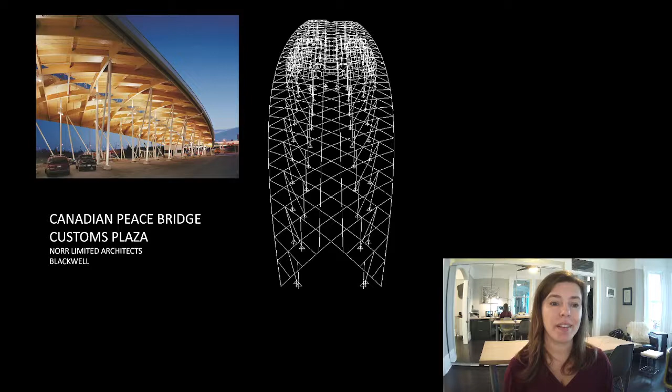This is the Canadian Peace Bridge Customs Plaza. I normally tell students that if you've driven across the border and had your car torn apart, this is probably where you parked while you did it. Although most of you haven't crossed a border in forever, so many of you may not have even seen this.

It's a reciprocal frame, meaning it's not stable until all the parts of it are in. Dave and I have given lots of lectures on reciprocal frames. We've talked in Helsinki, we've done podcasts in Australia, we've given lots of talks on reciprocal frames. It's a really cool micro element within structural engineering.

It also had this cool element where all the floors had a big opening cut in the concrete, so obviously there was some analyzing of the old existing building in that. But one of the really cool things was on the roof, they wanted to add mounds of soil up there. That roof was designed for some snow loads, and that was about it. It wasn't strong enough to take the loads that we needed.

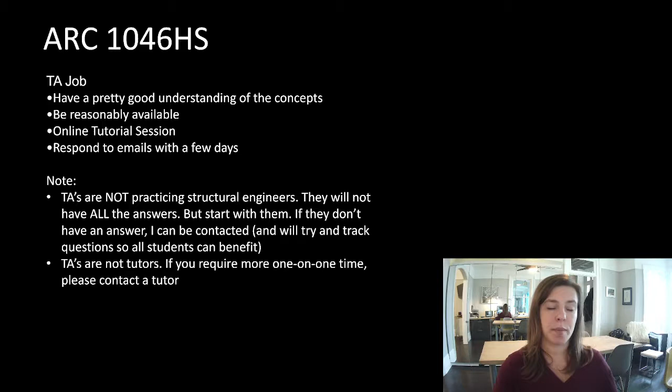One of the things I really want you to understand is that the TAs are not practicing structural engineers. They're students who have either done really well in my course, or maybe they've done an engineering degree, but rarely are they anyone who has practiced structural engineering, which is not the same thing. A lot of the concepts we're talking about would come from real world experience. They will not have all the answers for you, and they shouldn't have all the answers for you. But start with them - they can probably send you on the right path. If they don't have an answer, that's when you guys can come to me with the question. Again, they're not tutors, but if you require more one-on-one time, you should probably try to reach out to someone.

So what's your job? You should watch all the videos. You should download the PowerPoints. You should review the examples. You should download all the material - don't print it, just download it, and maybe organize it nicely in a folder for yourself. You should submit any questions you have to the TA. You should definitely complete all the assignments. They're easy marks - some of them you'll have to do some work, it's not read it and you get all the points, but some of it, read it and you will get points. And then complete the project.

I usually do a pretty good job of giving you a full description of what you need to provide me. I make it very easy for you to get marks in this course. Failing someone is a lot of paperwork for me - it's so much paperwork, I don't want to have to do it. So if you can pass, I think we'll both be happy.

And then study for the exam. So if you need any extensions, additional time, or have special needs in any way, please contact Student Services so they can set you up in the system. I'll do what I can to help, but there are some things that I just am not allowed to do, especially when it comes to the exam.

All right, you should take notes, but the slides are available, and you can go back and watch the videos. You should just write down calculations, lists, and equations. I've always found it helpful to write something out - it helps lock it in my brain. I'm very nice about hints if you pay attention. Like, I will say, oh, this is a fantastic exam question, because it's literally what is on the exam. So if you just listen to my tips and hints, you can probably, without even thinking, get a high score on the exam.

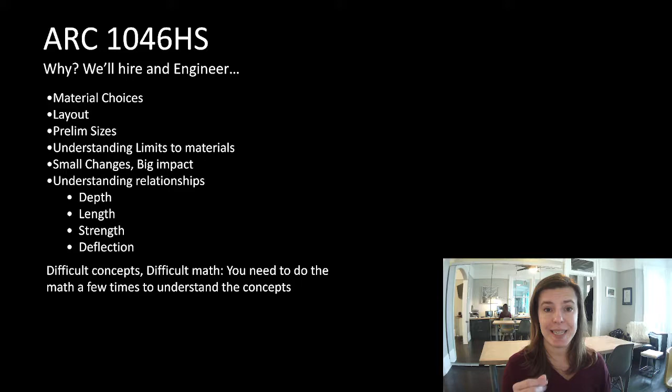There's usually a worked out one in the assignment, and then there's usually a second worked out one that we don't go through together, but you have it there for a reference. So for most things, that's 3 different types of problems of the same kind of thing we're discussing.

So I said that this is structures 1 and structures 2, and we need some way to break the information up into these 2 different courses. Different teachers break it up different ways.

This is the way I came up with, and I've since seen a lot of other course layouts that are very similar to this.

So what we do in structures 1 is we talk about how we create our system. What's our preliminary design of the members? This means not the actual design, but what we would put on a set of drawings very early on, before we've done the design.

So this would be what you guys do. This is the architect's job that we were talking about here. Then we'll talk about what the engineer does and how it works with you guys.

We'll look at the loads and the load paths, and then we'll look at the element loads. So each element, what the internal load is on it.

I'm gonna just pull out my handy, I have to hide this or else my kids play with it.

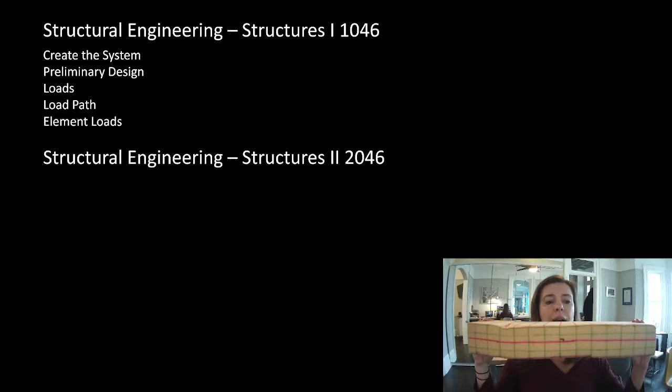Here is, I'll use this a lot to talk about how things, this has been squashed a little bit, hiding in my filing cabinet. So you can see that this is straight.

If we put a load here in the middle, it would move like this. So the question is, you can see the top of it squishing and the bottom stretching out a little bit. You can see those rectangles deformed in different ways.

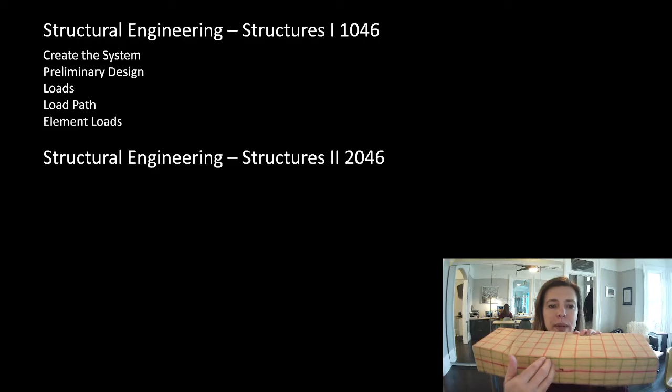We want to know what's happening inside here that makes that happen. And so those would be our element loads, or the loads internal in our elements.

And then in structures 2, we design and size the members. No problem. That's all we've got to do next term when we come back, when you guys come back and join me in 2023.

It's really where all the concepts come together and allow you to pick the perfectly sized member. So that's where we have to talk about all of the different materials.

And so how do these internal loads impact something in steel, something in wood, something in concrete? So basically on this side we figure out what the loads are, and in this half we figure out what resists the loads.

Okay, so now we're going to get into lecture 1. And in lecture 1, we're just going to talk about what is structure. Really, why are we doing this, and talk about where it fits in the design process.

We're going to do a quick review of basic math. I'm not going to spend any time showing you how to work them out. I'm going to assume that you've gone through some of that in your life, and if you need to, you can go back and look those up.

But I just kind of want to give you a quick refresher on the basic math, and that will be on this week's assignment. And then we're going to talk about strength, stiffness, and stability, because those are really the three core concepts of structural engineering.

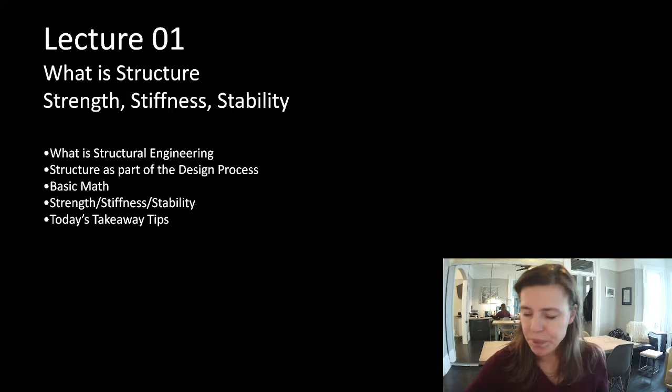Okay, so let's go through lecture 1.

I just want to give an idea of what structural engineering means. If you look up the definition, it's a field of engineering dealing with the analysis and design of elements that support or resist loads. What does that mean? We have to figure out all the loads, all the things that happen in the world on our building, then figure out how that moves through the building, and then figure out if all of those things holding those loads up are strong enough to support them. So the analysis is asking, is it strong enough? And the design is having an element that works.

So what's our goal? Design safe, stable buildings that are the cheapest possible while meeting the constraints, needs, and demands of the client. Cheap does not mean ugly, but it often means the lightest thing we can possibly do. So cheap is our goal.

If you could pick two mugs that looked identical and performed identically, why would you want the more expensive one? So we're saying it doesn't have to be ugly - that's one of the constraints. We are making something beautiful. My job, within those constraints, is to make it as cheap as possible. If you say this is an important thing, we need this, it's expensive, what's the cheapest way to make this expensive thing? That's a reasonable constraint. We're not trying to say cheap equals ugly - we're trying to say cheap has a value added to it.

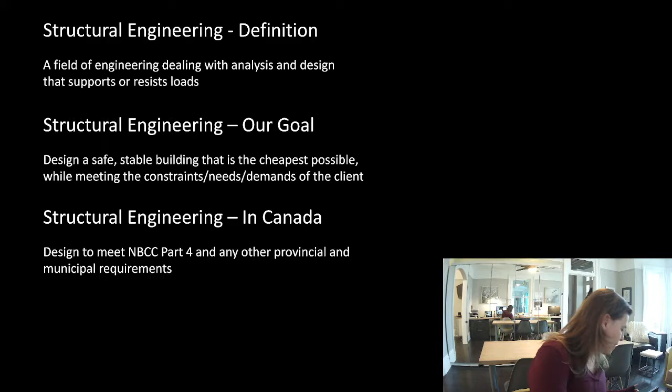Often the cheapest is the lightest of that material. So let me try to find an example - we have a Sharpie and a fine liner. It's probably hard to tell, but the Sharpie is much bigger than the fine liner. If both of these could support the load, why would we get the heavier one when the cheaper, lighter one will do the trick?

Engineering in Canada has a very specific requirement: we have to design our buildings to meet the National Building Code of Canada, Part 4, and any other provincial and municipal requirements. Provincial for us in Ontario is the Ontario Building Code, again Part 4. Part 4 is the structural component of the Canadian codes. Architects are usually working within Part 3, the structural engineer usually within Part 4. There is a Part 9 that has some structural component, but that's what you use when you don't design - if you want to just look things up in a table and you meet the constraints of Part 9, you can use it. We're not here to talk about Part 9, we're here to talk about Part 4.

You will see there are some spots in these lectures where I say, hey, if you were doing Part 9, this is what you would do. But that is not what we're doing here in this course.

When you're designing - and this is a hard thing to get people's heads around, both architects and engineers - precedent doesn't mean crappy. Precedent means it has proven to work, and unless you have a good reason to do otherwise, why would you not use the precedent? It's probably the cheapest, quickest, and easiest option. Cheap, quick, and easy - without any other constraints, that's really our goal. So understand the precedent and use it when you can. If you can't, take the precedent and tweak or change it to meet your new constraints.

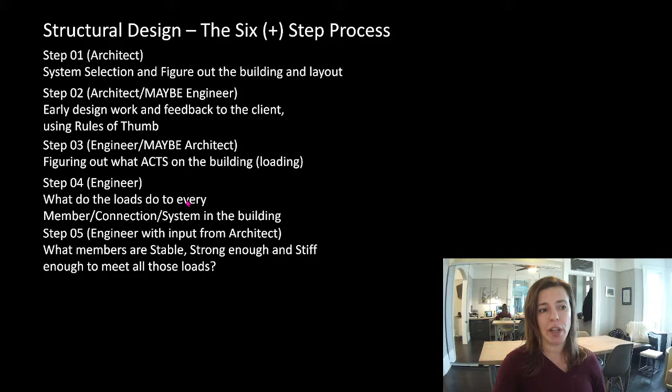Then the engineer goes through the process, and maybe we'll ask the architect some questions, and we find a member that is stable, strong enough, and stiff enough to meet all of those loads. We figure out what all the internal loads are on all of those things, and then we check and see if the elements we've picked work.

Are they strong enough? Are they stiff enough? And are they stable? Then maybe the architect says, oh, that one's too big, or we've moved this around, or we've changed the length of this, or we have to increase the story height here. So you have to go back and go through the whole process again several times, and that's usually the normal iteration of the design process.

So what does structural design mean to you, the architect? Well, you'll need to know how to pick the best system. Now, best is not literal—there's always different ways to do things, but the best system for your needs. That usually means the cheapest and then the smallest within your constraints. The best layout means knowing what constraints the owner has given you.

And you'll need to know the approximate sizes, which would be the rules of thumb or the sizing guidelines.

Here's the cool thing though: you guys have secret weapons that engineers don't have. You get exposed to precedent—so many cool precedents. Engineers don't look at an actual building pretty much ever. I don't remember looking at a building as a whole in my entire schooling. When I started working on the first day, I was blown away by how much I didn't know about how a building comes together. I knew how to design a beam, I knew how to design a column, but I didn't know how to bring those things together. You know how all the cool buildings come together and what they look like.

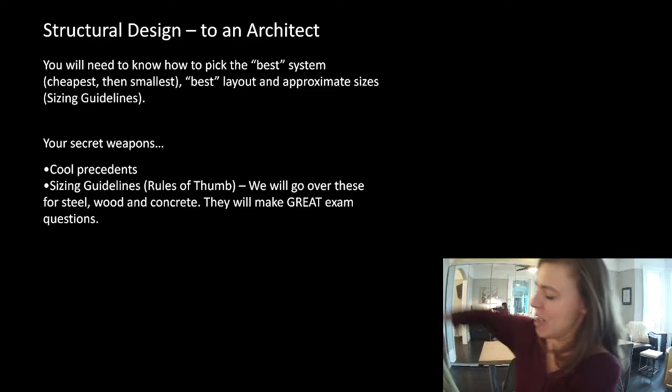I just need to check and make sure. Hi, well I just turned it on. Say hi. Hi, who are you? I'm Malcolm. How old are you? I'm 5. And what's your favorite thing in the world to play with? Number blocks. Do you love numbers? Yes, so much. All right, go, go, go. Okay.

Okay, so the sizing guidelines are your other secret weapon. We'll go over these for steel, wood, and concrete. What it does is give a very simplified guess at what member you'll need to do that job. It's not the right answer, but often once the actual structural math analysis by the engineer has been done, you're going to find it's a pretty close guess.

Why do you need to do it? Because it's a really good placeholder to draw in your drawings. Often you're doing a set of drawings early on, and if you drew beams that were this deep on a 5-story building with really tight height clearances, and when you hire the engineer you find out you need beams that are this deep on all 5 stories, you've missed out on this much depth within your building. When you build that in so people don't bonk their heads on the beams, you've gone over your height limit, which means you have to chop off a whole floor of your building.

All of a sudden the owner can't afford it with the rental space they have, and the whole project gets cut. That's an extreme version of it, but that's what we're trying to avoid, and what you're trying to avoid. Knowing that you needed a beam this deep, maybe it ends up being this deep, maybe this deep, but it's not a drastic difference. So it's a really good placeholder on where to start. The final design will probably be pretty close to it, assuming you're in the world of normal things. If you're doing something unusual, the sizing guidelines aren't going to be as helpful for you.

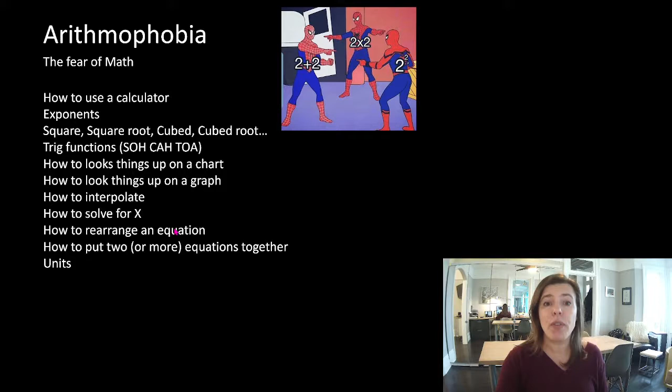Now, some of these I won't look at explicitly, and we will cover them throughout the term. And some of them you'll see, like even in our trig functions, when I review the basic trig functions, we rearrange them to solve for the unknown we want to solve for.

Like I said, some of you are terrified of math, and I found this, and it really struck me that my partner Dave and I, as much as we spend all our time doing math, every now and then we have to go back to first principles and do integrals from, like, third order integrals or something like that. And even then, I am terrified of math sometimes.

When I was in university, in the engineering department, engineers, you might not know this, but engineers like to be right all the time. We're not good at being wrong. So a lot of them came into the program, including me, being a know-it-all. And so they purposely built into the curriculum the 'we will break you' course. Most of them had never gotten a bad mark in anything in their life, so they purposely made it so that everyone would fail. Everyone fails that course. You can do everything you do at your best and you will fail that course. It is impossible to pass. And then they take the highest mark and set it as 100 and scale the course accordingly. I got a 40 on the exam and I was in the top 10%, and so I felt really good about that day. But there was a lot of sobbing throughout that course, so I get it.

I respect the fear of math. Okay, let's give some quick math refreshers and then we'll jump into the actual lecture.

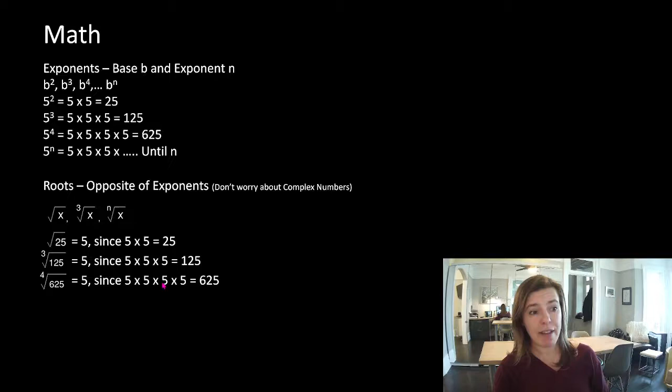So what we're saying is what number, or what would the opposite of it have been? So the fourth root of 625, basically what number timesed itself 4 times to give 625? So root 4 of 625.

So that would have been 5 by 5 by 5 by 5 giving us 625. I know most of you know this. I'm just trying to flesh it out and calm down the people who get worried about the math here, because I've already had emails from people worried about the math, and so I just want to calm everyone down.

So most of you have a scientific calculator of some sort. We're not going to use a lot of the buttons on it, but we will use some. I think this is like $15, and I recommend you have a scientific calculator.

Yes, I know your iPhone, if you pick calculator... my phone is apparently having a meltdown. Wow, it didn't like that at all. For most of you, if you have your phone like this and turn it on its side, it will turn into a scientific calculator. The iPhone calculator, I don't know what it is, but the buttons, I have to punch everything in 5 times, redo it so many times. I much prefer my calculator.

I can't always tell you exactly how your calculator works, because some you have to press the second function option first and some you have to press it second. So every calculator is a little bit different, but you usually want one that has a second function button. You can see this calculator died on me, so this is the next generation of the same one. This is my b to the n or y to the x. They usually have the default of squared and cubed, the square root, but then they also have cubed root and x root.

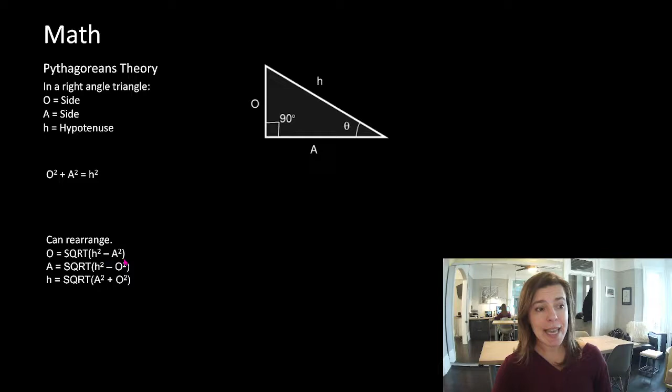So we can rearrange it. Here's our H, it's the square root of A squared plus O squared. So we can arrange, if we knew H and A, O equals the square root of H squared minus A squared. So with any 2 of these sides, we can figure out the third side.

What else do we know about a right-angled triangle? Well, I always called it SOHCAHTOA. Someone one time came to me with another name for it that I had never heard, and it blew my mind. But I'm going to call it Sohcahtoa.

O is the opposite side, so we're picking an angle. We could pick this angle or we could pick this angle. If we pick this angle, this is the opposite side, this is the adjacent side, and this is the hypotenuse. In a right angle triangle, the sine of the angle is opposite over hypotenuse.

The cosine of the angle is the adjacent over the hypotenuse. And the tangent of the angle is opposite divided by adjacent.

And I cannot stress this enough: make sure your calculator is in degrees. If you have it in gradians or radians, you will be absolutely effed, because sometimes they can end up with a pretty close answer, just enough to screw you up. A lot of times it'll be totally obvious why you're getting wonky answers, but not always.

So we can rearrange this to find the thing we need. If I took the sine of the angle equals opposite divided by hypotenuse, and I want to know what the angle is, I take the sine inverse of opposite divided by hypotenuse. If I knew the hypotenuse and the angle, the opposite side is the hypotenuse times the sine of the angle.

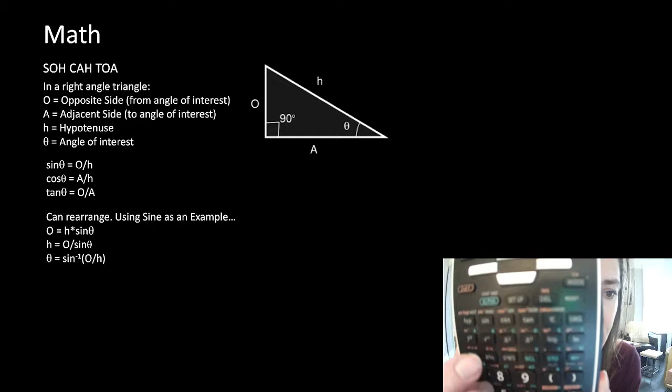How do you punch this into your calculator? Well, it's usually directly above whatever... it shows up on the next slide, but you have to use a second order function on your calculator. So make sure your calculator is in degrees.

If you want, here are some worked out problems that you can solve. If you know you struggle with this stuff, just cover this up and cover these up, and then you can go through and find your solutions.

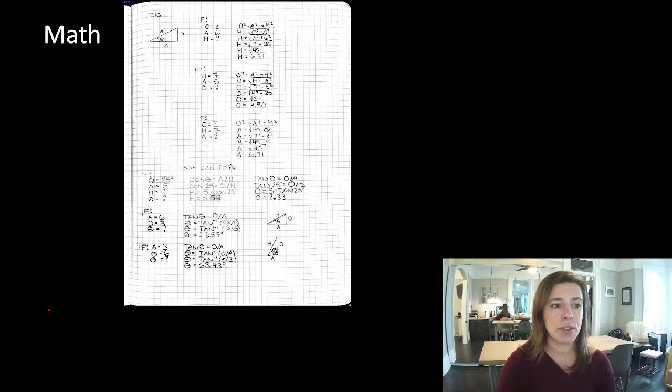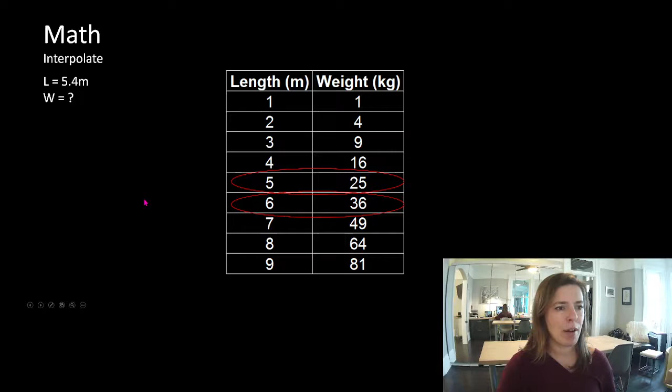So you figure out the difference between these two, and you figure out the difference between these two, and then you basically just make a ratio of those. You can go through this problem and solve it.

I find talking it through only confuses people. Intuitively, you often know how to do this. Look up interpolation, practice with a few problems, and you're gonna get the hang of it. Most of you intuitively already know how to do this.

But we got 30 kilograms on the chart. The exact, imprecise answer is 29.4. So some people like to do a triangle to help them interpolate. Here's just a slightly more worked out version of that same problem for those who might struggle.

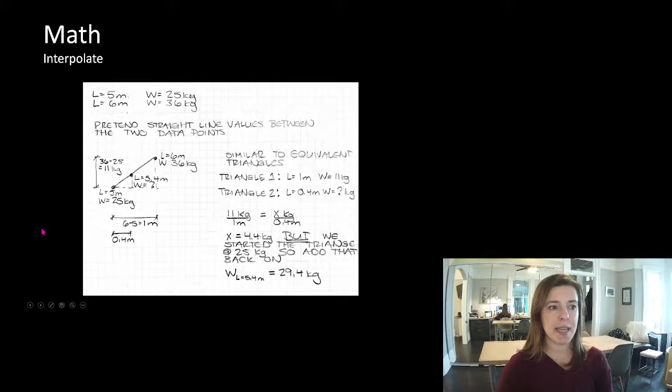What are some of the units that we're going to be talking about? Because we do have to convert between units. So length, we're going to be working almost exclusively in metric, except some things will be given to us in feet and inches, because a lot of residential or wood-framed construction drawings are still done in imperial, which is a total pain in the butt, but it is pretty standard for those types of projects. We will often, for wood projects, need to convert to metric to do our analysis.

So 1,000 millimeters is 1 meter, 1 inch is 25.4 millimeters, and 12 inches equals 1 foot. I'm sure these are all things you know.

Force or mass, depending on how you talk about it: 1 kilonewton is 1,000 newtons. 1,000 newtons is 102.06 kilograms, and that is about 224.8085 pounds, but we'll often use 225 pounds in our calculations. So if we need to convert something from pounds to newtons or kilonewtons, we'll use 225 pounds.

Pressure: 1 MPa is 1 newton per millimeter squared. 1 MPa is 1,000 kPa. So that means 1 kPa is 1 kilonewton per meter squared.

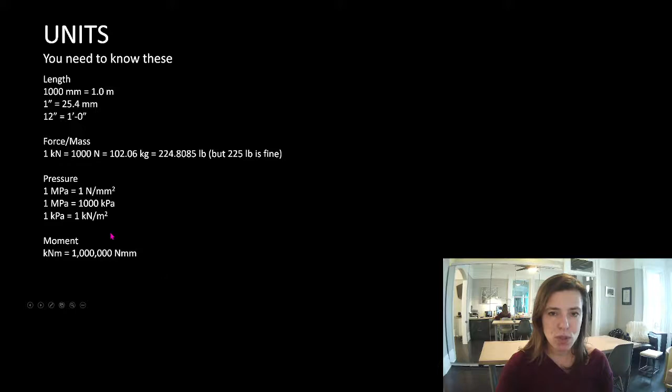Moment, we're going to be dealing in moment. You don't even know what that is yet, but it's a kilonewton meter, not kilonewtons divided by meters. There is no divide symbol here. It's a kilonewton meter, so those are multiplied by each other. 1 kilonewton meter is 1,000,000 newton millimeters, and we will convert back and forth between these two things. Not so much this term, but next semester or next year when we do structures 2, we are going to convert back and forth between these two all the time. In almost every problem we do, we're going to convert back and forth between these two.

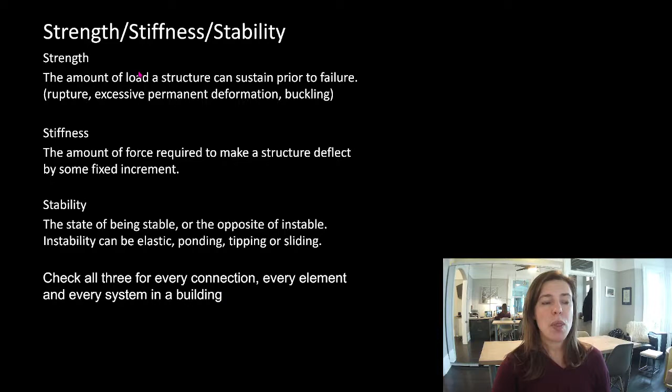For every connection, every element, and every system in a building, we check that it's strong enough, that it's stiff enough, and that it's stable. So we check strength, stiffness, and stability for every connection, every element, and every system in a building. These make good exam questions or test assignment questions.

All right, do you see this? We don't use this anymore. This was a way we used to do design. We used to say we have a load on a system and we know what its capacity is, and we don't want it to be just strong enough. We want a little bit of a buffer in there. So what does that mean?

All right, this is my table, and I'm sitting on my table. The material is wood, and it has some capacity to resist load. It's got to hold up the weight of the table itself, and it's got to hold up me. Now, what if I go out and eat a cheeseburger and have a beer, and I come back - and we had made this table just perfectly strong enough to resist the load of Shannon? Well, if I go out and eat a burger and a beer, I'm now Shannon plus a burger and a beer, and I get up on this table and it collapses. That doesn't seem like a very well-designed table if there was zero buffer in there.

So what we would do is we would often say, okay, I'm going to design it for 2 Shannons, or 3 Shannons, or 4 Shannons, or 5 Shannons. But we wouldn't have just done that. We would have said, okay, there's the weight of Shannon and the weight of the table, we're going to add those up, and then we're going to design it for 4 times the weight of Shannon and the table together. But it's a little bit weird because the table's not going to get bigger.

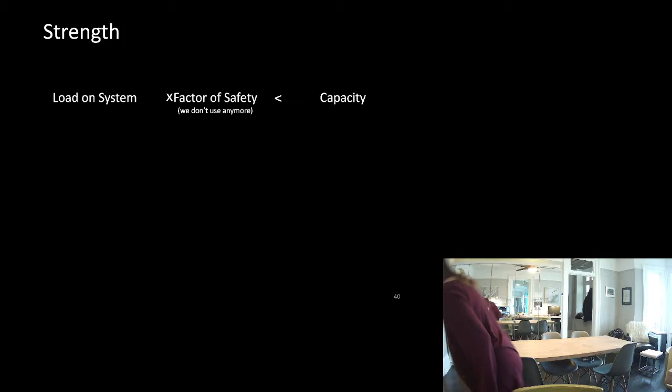It didn't treat that at all, and it treated the loads all the same way. So there was no variability in whether it was a live load or the weight of the table itself, me being alive, the live load. And it didn't do much about what the wood was capable of. We just had the capacity of the wood, and then we built it all into the loads, and we called that factor of safety.

So we would take the load on the system and multiply it by a factor of safety, and that factored load needed to be less than the capacity. But the fact that it treated all the loads the same and didn't address the materiality at all, people found a bit problematic. So they came up with a new system, and this is the system that we use here in Canada. They use it in the United States. They use it in most European countries.

Instead, what we say is, let's look at each load individually. We'll add them up, but we'll factor them independently. And we'll look at the material and we'll say, okay, we know that table is as strong as that table, but what if that table had a flaw in it? What if there was a knot in that table? What if there was something with that table? We reduce the capacity as well. So we factor up the load and we reduce the capacity, and this factored load needs to be less than the reduced capacity.

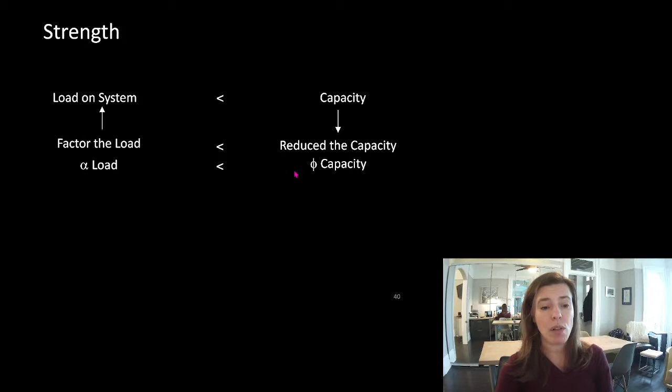Now, we like to name all things. So we factor the load, we reduce the capacity. We often use Greek symbols. This was less terrifying pre-COVID when we started giving Greek names to all of them. But we would factor up the load and reduce the capacity. You'll see this symbol get used a lot in structures too when we talk about the reduction factor for the material.

And then we look at that for every type of load. Now, you guys don't know what these types of loads are, but for example, moment. Well, that capital M means moment, and a subscript F means I factored the load. We want the factored moment to be less than the reduced moment. If you see a little F here, it means we factored that load. If you see a little R here, it means we've reduced the capacity. Whether we're talking about axial loads, shear, moment, tension, compression, it doesn't matter. The F means it's been factored. The R means the material capacity has been reduced. And we want our factored load to be less than the reduced capacity.

You're gonna hear me say this a gazillion times throughout the next year: we want the factored load to be less than the reduced capacity. We could take it almost to equal. In fact, it would be perfectly designed if these two things were equal. Now, we don't have the same danger of going out and eating a cheeseburger and beer and breaking the table, because that burger and beer has been built into the factored side of this. We don't have to worry about a flaw in the material or them not building it quite right, because we've taken that into the reduced capacity.

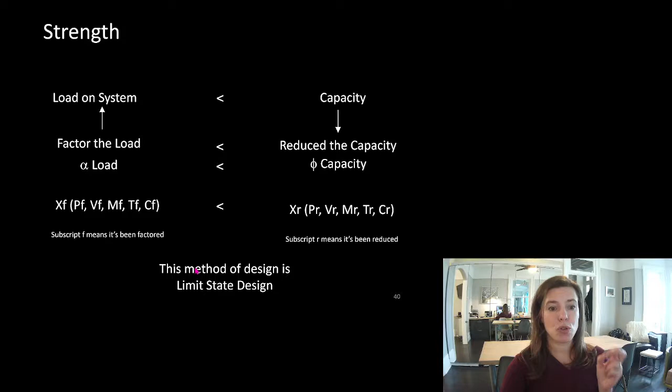So if we factor up the load and make sure it's less than the reduced capacity, we will be fine. This is called limit states design or limit state design. Sometimes you'll hear it called ultimate limit states design. It is not the same thing as the ultimate design case; that is something different. Limit states design has two components: ultimate limit states, which is all about strength, and serviceability limit states, which is all about stiffness.

All right, what are these different loads that I talked about? I said, if there's the subscript F or the subscript R on that particular type of load case, we know what we're talking about. Or force type, I should say force type, not load type. So these are the different force types, not load, because load is what we're putting on the thing.

So compression, intuitively you know what compression is: it's when we squash it. Tension, you know what tension is: it's when we stretch it. So this is kind of hard to stretch. Compression... oh, what happened when I tried to compress this? That was weird. When I try to compress this, that doesn't happen. I'm pushing just as hard. That seems like something we'll have to talk about later. So compression, tension.

Shear always messes with people. Shear is saying what happens—here are my business cards. We're saying what happens when these planes try to slip past each other. We have this side going down and this side going up. Those are trying to slip past each other. What happens there?

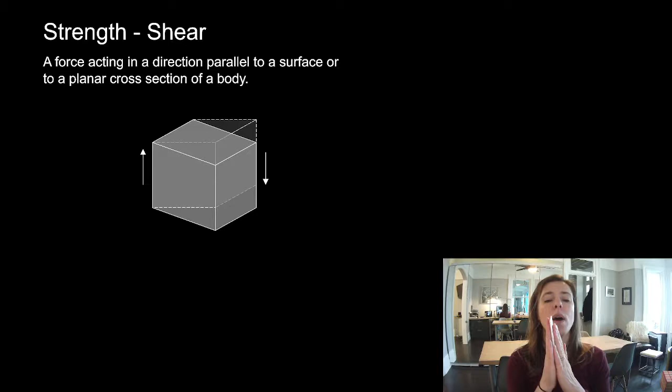Then let's go over another business card. We have to do the same thing, and over another business card, same thing again. We're looking at every single spot along the stack of business cards, saying what's happening as these try to slip past each other. For our member as a whole, we've sliced it up at every point along its length to see what's happening as any two planes try to slip past each other.

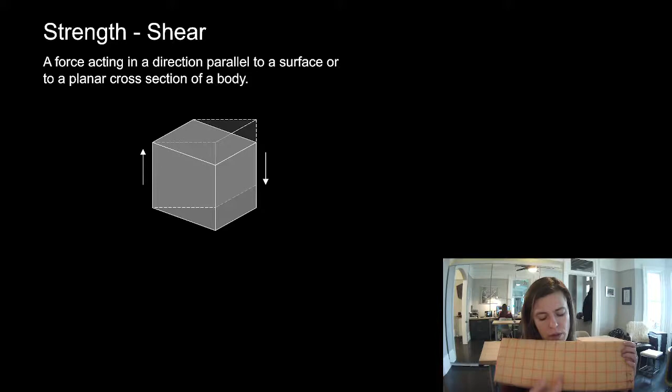If it's a connection, it's usually not too bad. If we're taking a piece of steel and trying to slide it past another piece of steel, it's very obvious where that plane is. If we've got a big long object like this, maybe we're trying to slip it along this plane, or this plane, or maybe in the middle here. As we add more planes and talk about a gap between those, we start to get this skewing action. So you'll often see this shape when we talk about shear.

Now look at this, it's really interesting as this happens. I had a square here, and here it looks like that is compressing on that angle, whereas here, those two look like they're stretching apart from each other. When we see shear failures in concrete, which we'll talk about in a bit, you'll see cracks along this line right here, or I guess along this line right here. It gets really interesting as those two things try to pull apart, because concrete doesn't like tension, and we'll get a crack right there.

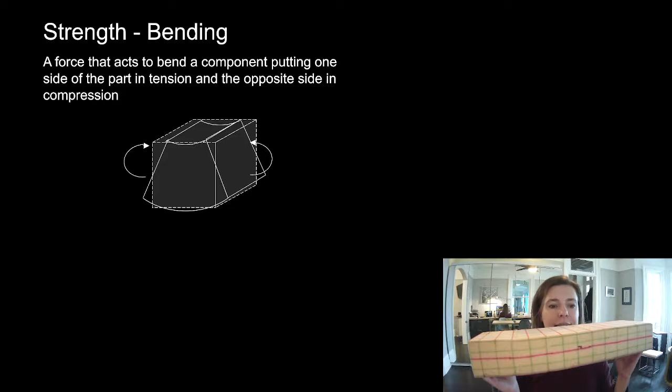Bending: a force that acts to bend a component, putting one side in tension and the opposite side in compression. Remember when I took this beam and bent it like this? We saw the top squares squash and the bottom squares stretch, and those all stayed as straight lines along there—that's a cool thing we'll talk about in structures too. The top is in compression and the bottom is in tension.

What happens if I bend it this way? Well, now the bottom is in compression and the top is in tension. It looks like no matter what we do, we find some way to relate this to tension and compression.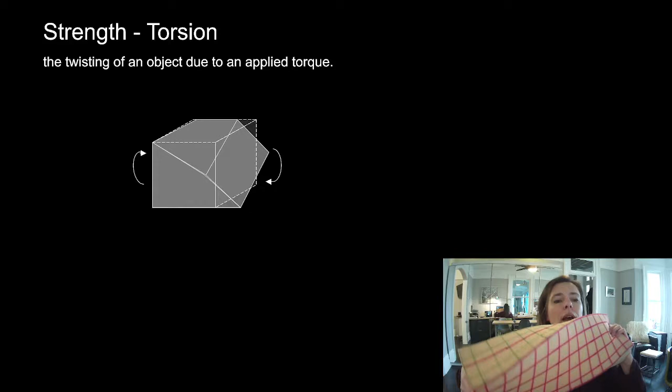Torsion, or torque, isn't something we're going to cover in this course, but it's this weird component of shear and moment about a different axis of the element. You can see we get that same weird skewing we got in our shear problem, but there's also a moment component to it. We talk about it in kilonewton meters, the same way we do moment. Again, we're not going to do any work on this, but it's important to know it's a type of force.

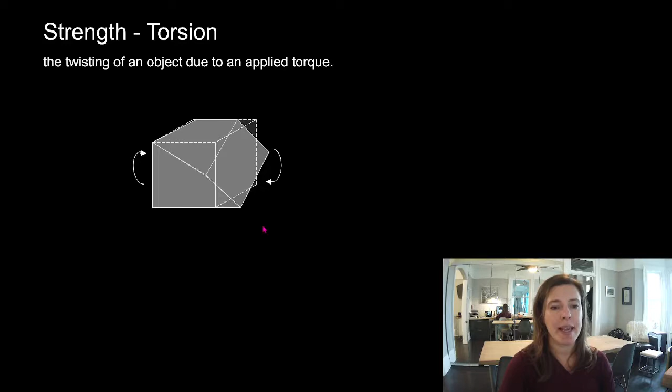Connections involve a ductile or brittle combination of axial, shear, bending, and torsion on local elements, or where they intersect with each other.

All right, let's look at some failures, because that's really the best way to get your head around what's happening. Otherwise, it's just an object not doing anything.

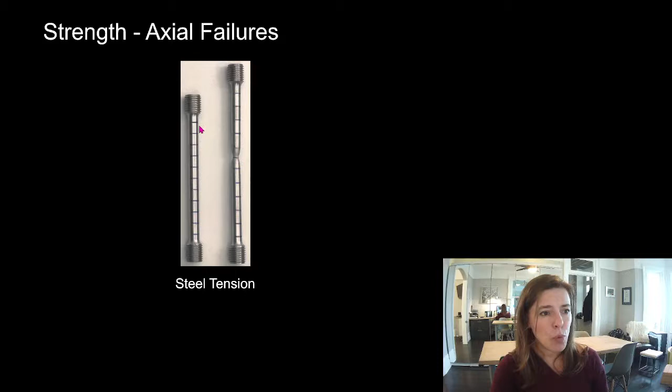Axial failures for tension: you can see our steel pulled—steel does some interesting things, and we'll look at videos about this next year when we talk about steel. But you can see, just like I did, they drew little lines on this, and every single one of those lines got some distance between them. Something weird happened right where it failed, but that's not the same dimension it originally was. So there were original sizes, and then there were the final sizes.

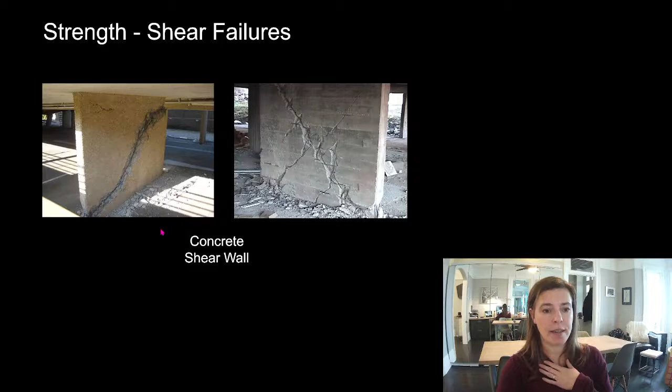Well, this one was a windstorm of some sort. It could have been the same as this one, and we'll talk about it in a second, but often this is a pretty distinct failure. Wind usually has very high loads in one direction. Obviously there's hurricanes and tornadoes, but those are so isolated and usually not acting on the building as a whole over its entirety. Even a hurricane would usually have higher winds on one side versus the other. I'm from Halifax, and when Hurricane Juan went right through the eye there, certain trees went down in one direction and certain trees went down in the other direction. But even still, the wind is usually highest on one side. So this was a windstorm.

This was an earthquake, because earthquakes often with the same force will make your building shake back and forth. So this is very distinctly an earthquake failure.

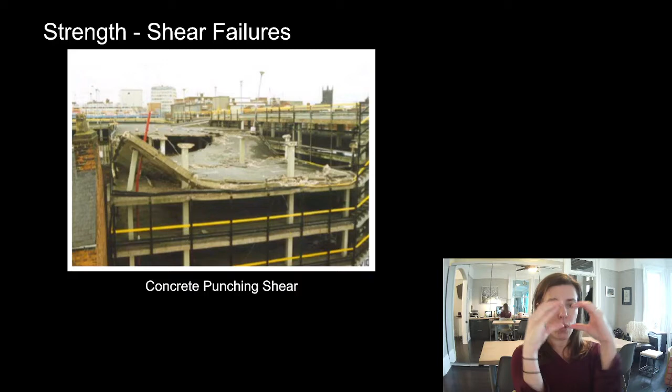If you tried to hold up a block of Jell-O on a toothpick, you know it would slip down. That is a punching shear failure.

I don't want to talk about recent failures in case it's sensitive to anyone, but you can see here that they put things at the top of these columns. Often we'll put capitals or dropped slabs to try to increase the thickness locally around the column to prevent that punching shear phenomenon.

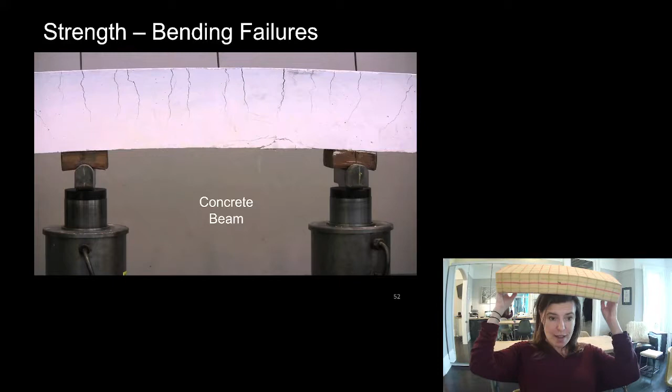This is a concrete beam. These aren't the supports, these are the loading elements. This concrete beam is actually much larger than what's being shown in this photo. So what we have here is a support here like this, and it's pushing up on it. So the top is in tension and the bottom is in compression. Concrete does not like tension at all, so you can see these are tension failures in concrete, and this is a compression failure in our concrete.

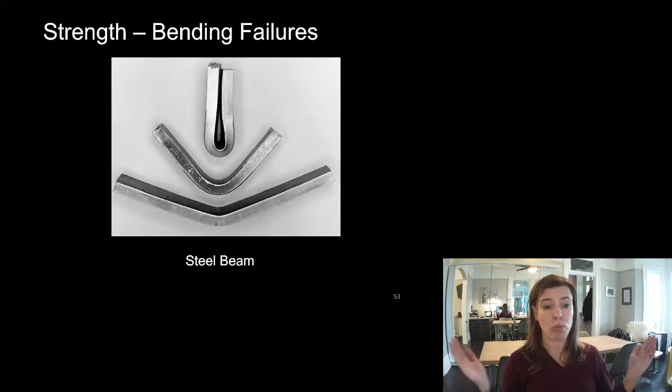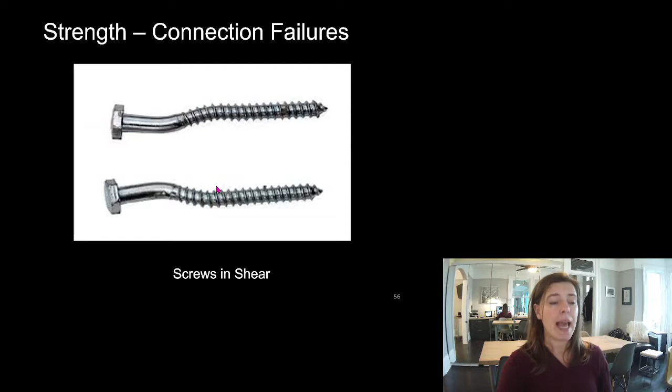So you've sheared off the head, even though what you've really done is torqued off the head. Here's a steel shaft, so this would be some sort of drilling rig. Here is a screw in shear. We said that's the act of these two things slipping past each other. If I put a screw through there, one side tries to go up and one side tries to go down. So that goes up and that goes down, and in this one that went up and that went down, and it deformed it in that diagonal failure I talked about.

So here's a close-up of a beam in shear. This likely wasn't an under-designed situation. What often happens when they're installing steel—because the boom lifting the steel into place is the really expensive part of the construction—they'll often have someone just follow along, hoist a beam in, and put a bolt in. For the self-weight of the beam, one bolt's probably just fine. They might even put two in. Then the idea is later they'll hire the cheapest person in their crew to go back and finish putting all of those bolts in, and then they'll start building the rest of the building on top of their steel.

My guess—now it's always hard to go back and analyze something from a picture—is that this was a condition where they didn't come back and put the bolts in.

This is a plate in tension where they actually managed to pull it apart.

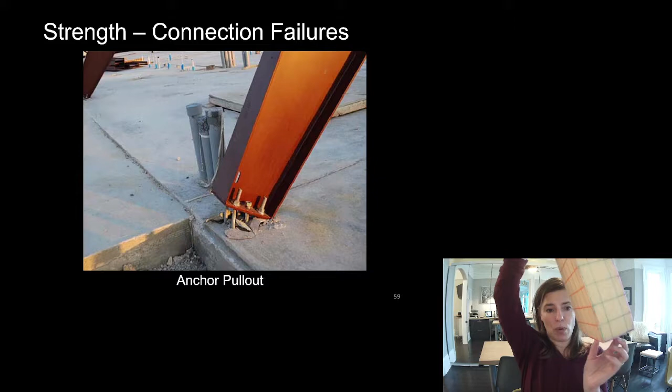Here is an anchor that has pulled out. Now, what's happened here is this column tried to tip over, and down here we had two anchors close together. As it tried to tip over, it forced it to bend a little bit there. This side pulled up out of the ground and this side squashed down.

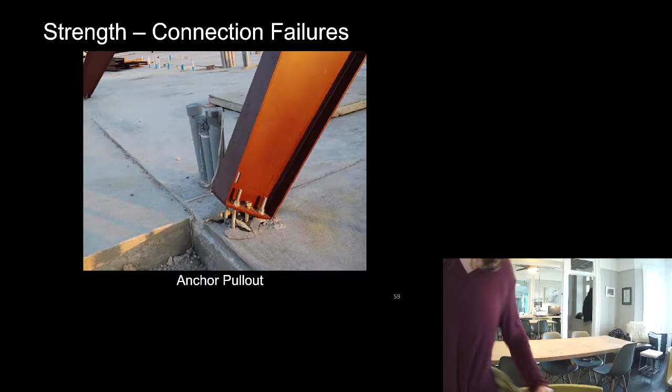What would happen if I turned this and separated those anchors out a little bit? Do you think it would be able to resist more or less load? Intuitively, you know that if something's trying to tip over, you spread out the bottom of it. If you tried to stand balanced on your toes and someone tried to tip you over, you'd tip over very easily. If you spread your feet flat, you're a little bit better. Spread your stance apart when somebody tries to tip you over—it's a lot harder. What you've done is understood implicitly how to resist a moment.

We're going to talk a lot about this. We're going to draw pictures of it, and you're going to get yourself all confused. But intuitively, you understand how to resist moment.

So, stiffness. Stiffness is not a life safety problem—strength is about preserving life, we want people to live if something happened. Stiffness, as much as it's not about life safety, is the thing we get sued about all the time. People hate seeing cracks in their finishes, they hate seeing something wrong, and they assume it means there's some major problem. Sometimes there might be a major problem, and sometimes it might not be that big of a deal.

But I would say probably—what would you say, Dave? 90% of the lawsuits are about stiffness in some form? Probably.

So we can have different types of stiffness issues: vertical, horizontal, rotational. We can worry about soil, and then vibration. Vibration's often its own category, but sometimes for certain purposes we'll lump it in with stiffness.

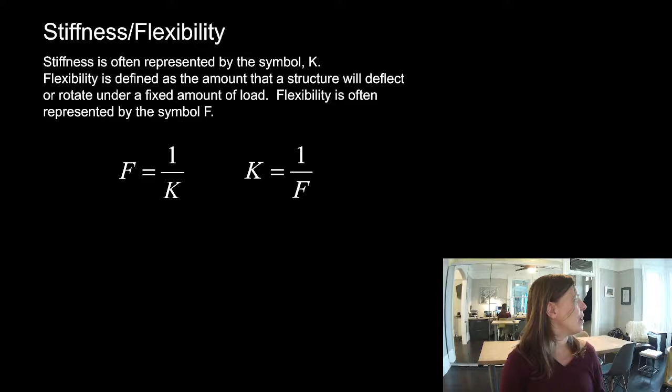Do you want me to finish up that food? I can stop if you need me to, Dave. He's deaf in one ear, so he has a phone to his good ear and he can't hear me now at all. Do you want me to finish that up? That'd be great, sure. Okay.

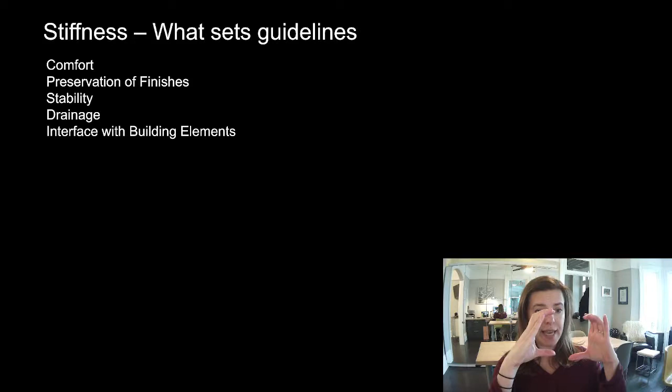So interface with building elements — a really good example would be windows. Our building is allowed to move a little bit, but a window, a piece of glass, is very, very rigid. It can't move at all while the building moves. So what we do is build almost like a frame that we sit the glass in, and there's a little bit of play, so that frame can skew with the building but the glass stays in it. We want to make sure we know how much the building moves so it doesn't squash the glass and break it, or move so much that the glass pops out of the shoe we've built. So we're talking about how do we preserve the finishes on this building and interface with building elements.

And now each of the codes has different criteria for different situations. Let's say for the roof, for example, are we talking about snow by itself or the self-weight and the snow together? And then, are there finishes that are susceptible to damage or are they not? Drywall is susceptible to damage. Plaster, anything that cracks, is susceptible to damage. So no ceiling — a big steel warehouse, for example, does not have finishes susceptible to damage. You put a drop ceiling in there, if it bends too much or there's too much deflection, those panels pop out of their frame. So that is susceptible to damage.

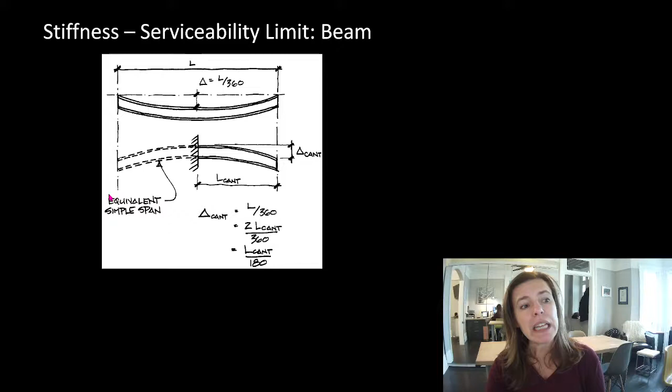Okay, here's an example. What is the amount of live deflection we will accept for a wood floor beam with drywall that spans 10 feet and has a 2-foot cantilever? Well, drywall tells us it's susceptible to damage. We're not worried about the dead and live combination, we care about the live deflection by itself, and it's a wood beam and it's a floor. So it looks like that's everything we need to pick the criteria: wood floor beam with drywall for live load. So floor, live, susceptible to damage, and it's wood.

So length divided by 360. We need to convert our 10 feet and 2 feet to millimeters because we want these deflection criteria in millimeters. The back span was 10 feet, so we take 10 times 12, because there's 12 inches in a foot, times 25.4 millimeters, because there's 25.4 millimeters in an inch, and we get 3,048 millimeters. For the live delta criteria, delta just means deflection or change. The live criteria for wood floor with finishes is the length divided by 360. So the allowable deflection, or the serviceability limit for this beam, is 3,048 millimeters divided by 360, or 8.47 millimeters. That is the serviceability limit on this part of the beam.

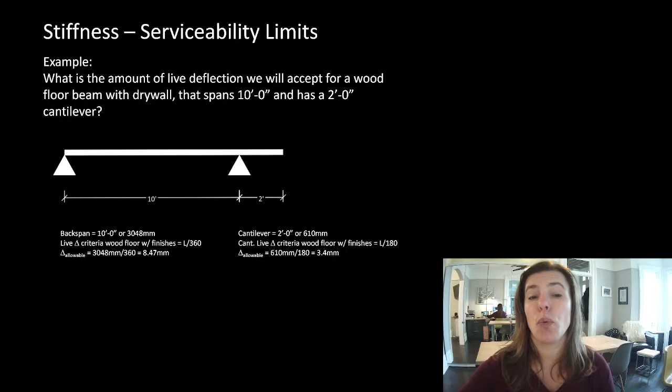In the assignment, I will say please write your answer to so many decimal places. So for this one, I might have said write it to 2 decimal places. If I only said write it to 1 decimal place, your answer is 8.5 millimeters. Going back to that, if I said 2 decimal places, and the answer is 3.4, when you try to put in the 0, it will delete it from Quercus. It doesn't mean you're wrong. If the 0 is supposed to be there and I ask for 2 decimal places, it'll look like Quercus is erasing it, but don't worry about that — it doesn't keep it in there, but it knows you have the right answer, assuming that was the right answer.

Okay, serviceability limit for lateral loads. This is how much our building can move under wind or earthquake. Now we have two criteria: each story, and the building as a whole. So if this is the height of the building, for wind, there's a subscript W, the deflection we let our building move is H divided by 500. So what if we had a 32-story building that was 3.2 meters each, so times 1,000 — that's 100,000 millimeters divided by 500. We're allowing that building to move 8 inches, so about 200 millimeters.

So it's actually a lot of movement. For earthquake, we allow it to move even more: H divided by 50 or H divided by 100. So we allow a lot of movement for earthquake, as long as everyone gets out alive. We don't care if a little bit of drywall gets damaged — it's such a rare event, and we accept a certain amount of loss due to an earthquake. So that's the building as a whole.

What if we had a really stiff building and one story that was weak? Well, we limit that story as well, so we have to do that same check for each story. The building as a whole might have met the criteria, but the height of this story divided by 500 might not have met its deflection criteria limit.

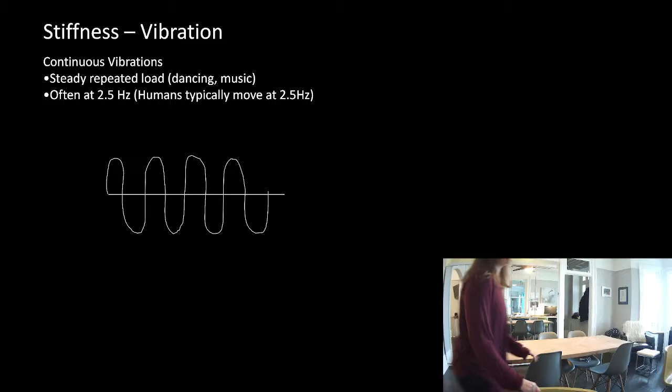A steady repeating load like dancing or music is often at 2.5 hertz, so humans typically move at 2.5 hertz. Stand up - this is a lot better when everybody's in a room together. I tell everyone to go up on your toes as slow as you can and down. It really burns the calves. Then I tell everyone to do it as quick as you can - again it starts to hurt. Then I tell everyone to do it just the amount that feels comfortable. If you looked around, everybody might not be moving at the same time, but they'd be moving at the same rhythm, and that's about 2.5 hertz.

Oh, I need to stand up for the next thing.

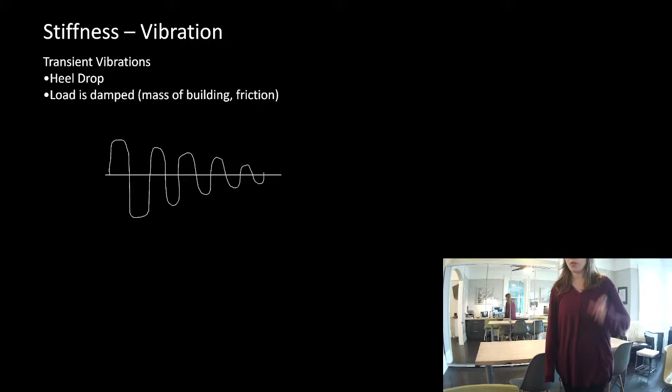Buildings - we also don't like floors to, we want them to dampen a load quickly. We don't want people to feel a transient vibration. So for example, you're going to see my camera move around there a little bit. You saw that move around a little bit and then stop. One of the reasons it stopped so quickly, but you could hear my window rattle for a little bit longer, is that the arm of my video camera dampened the load from me dropping my heel. So it had a very large initial reaction and then it tapered off really quick. Whereas the window had a really large initial reaction and then it took a little bit longer for it to dampen out.

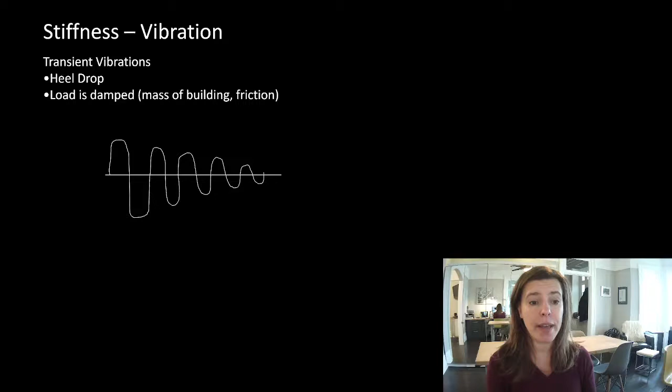So we like to have mass. We use weight often to help solve our dampening problem of vibration. Often we have concrete toppings on floors, specifically because it helps limit that annoyance of vibration through the floor. If you have somebody running laps around a track, you don't care so much. But if you have somebody running laps around a track by your office, it's really going to start to be annoying.

We also worry about amplification or resonance of a building or elements within a building. In an extreme condition, it could even lead to failure. This is what happens when either human movement or wind or seismic movement are at the same frequency as the object. So if the frequencies are the same, they'll start to amplify and build on each other.

If you've ever been walking on a steel pedestrian bridge, you're okay with a little bit of vibration. You accept a different standard of vibration than you do in a house, for example. But if you've ever been walking across the bridge while somebody runs by, it feels very different. I've also gone running on one of those steel bridges, and when you go to put your foot down, it feels like the bridge isn't there anymore, because your vibration has started to meet the vibration of the bridge, and when your foot comes down, the bridge has dropped just a tiny little bit from where your brain expects it to be.

Vertical deformation. Now, my old house, pre-kids, my husband and I lived in a very small, tiny shack of a building. Divorce is expensive, and this is what we had left to move into - our crappy little house. So when we were doing renovations, we had put all of our storage up in the ceiling space. We had laid planks down on the floor and tossed all our stuff up there because we had nowhere to put anything. When we decided to renovate and clean things up a bit, because this was a gross little building, we wanted to put windows in here.

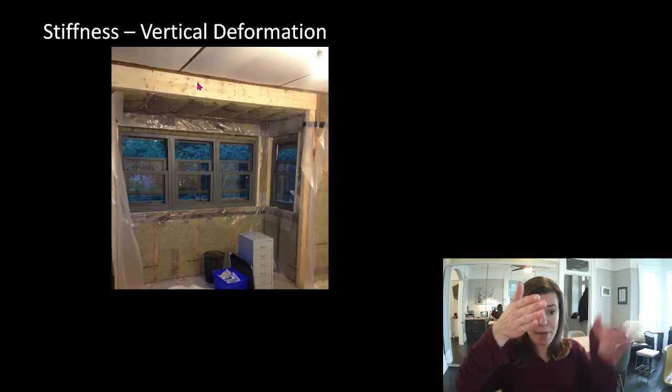This is what it took to solve the problem. We supported it with jacks and put in new beams. These ended up being a 3-ply 2x8 or 2x10, I can't remember—I think it might have been a 2x8. So what that means is we had three 2x8s stuck together and screwed together to make one big beam, and that's what it took to actually meet the criteria to support that load.

This is a ceiling that did not meet serviceability criteria. You can see that the finishes are all cracked. So here's where I'm going to reiterate that drywall, or gypsum wallboard as it's often called, or sometimes abbreviated GWB, is susceptible to damage.

Here is a wall without reinforcing in the block wall, trying to resist soil. So here's the window well. There's soil on the outside of this, and that wall is bowing in to the basement.

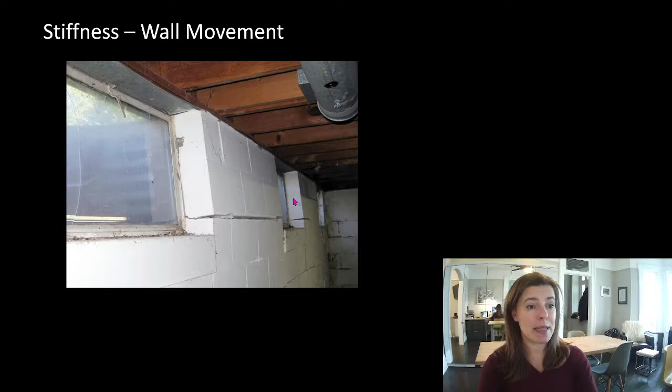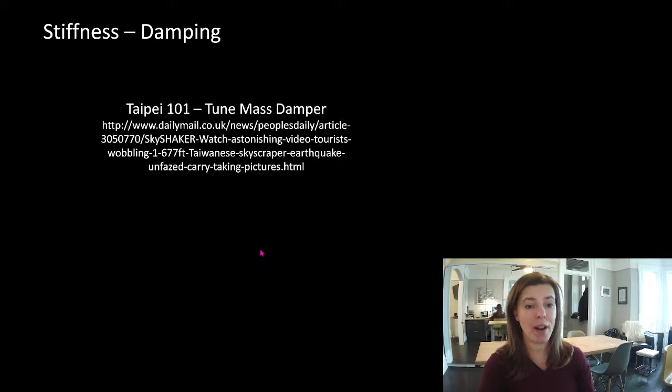If you feel like it, watch this video. It's a fun video of somebody at the Taipei 101 building during an earthquake, a bunch of people, and you see the tuned mass damper activate. Everybody stays calm, surprisingly calm—I think I might have been freaking out. And they keep taking pictures. In fact, what's interesting is because the camera is mounted to the building, it doesn't look like the building's moving. The building is actually the thing moving. What you see is the tuned mass damper move and the people move, but the tuned mass damper is actually staying still and the building's moving around it. The one person who doesn't look like they're moving is the person who grabs onto the sign to take a picture, and they start looking like they're staying still. But remember, it's the building that's moving, and everybody's adjusting their position to not move. They're trying to stay upright while the building's moving around.

Here in Toronto, when the football team first came and they had the outdoor bleachers, they weren't expecting quite such a large fan base. People started noticing that the bleachers were getting quite movey at the end of the first season, and they went back and found that the nuts were starting to loosen off. So they had to go in and weld the nuts on, because the vibrations can actually back off nuts.

Stability. What are stability failures? What do they look like? Remember I said we want our building to be static. That doesn't mean that it doesn't deform - deflection is something different. Static means it's not flying off into space; deflecting a little bit is something different. Stability means it tips over, it slides, it could be thrown up in the air, but that's not often what a building does. It could be elastic, which I'll show you what that means, or ponding.

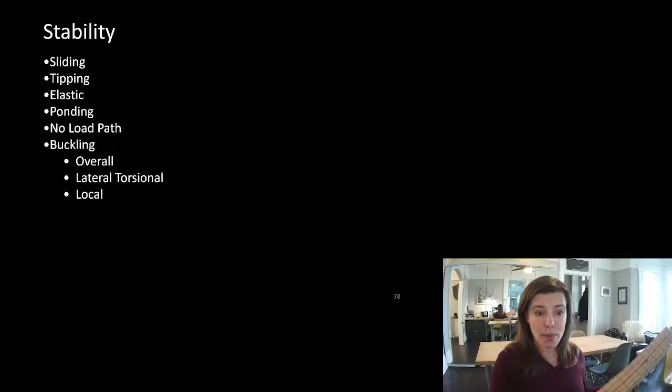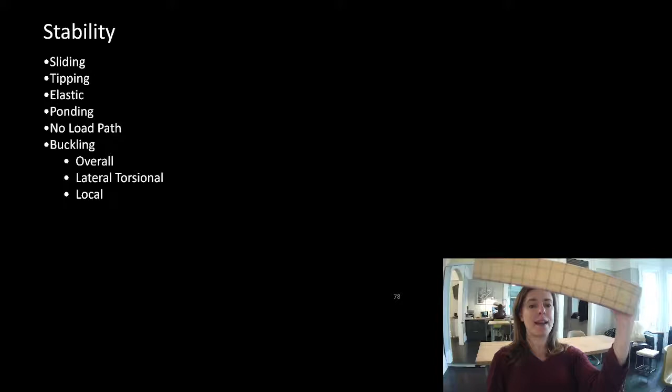There could be just no load path. Maybe you haven't done something right - you just haven't given anything to support it. If we had a cantilever like this, I've got two supports back here and there's a cantilever. If I just tried to make this a cantilever, there's no load path. If I wanted this to be a cantilever, I have to have a moment connection here - see how I have my hand gripping it? That can resist moment. If I just tried to support it like a normal beam on two pins, it's fine, but if I take one side away, it's not stable because there's no load path.

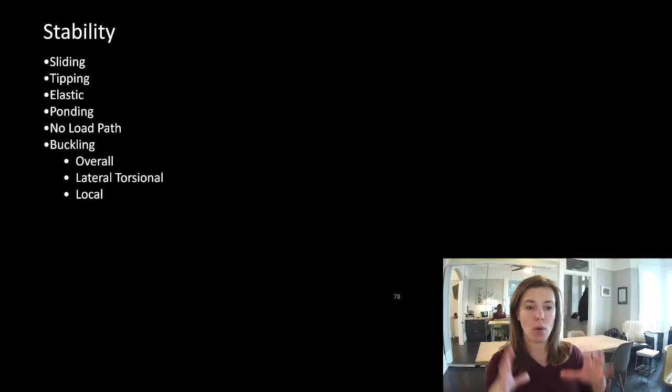Remember when I talked about compression? When I squashed this way, it was fine. When I squashed this other way, remember? It did that, and I said that's something we'd come back to - that is buckling. So compression will govern something that's stocky or short. Something that's tall and slender will be governed by buckling, and it's a stability problem, or it's related to stiffness.

So for a column, we have overall buckling. For a beam, we have lateral torsional buckling - that means I try to bend this beam. Remember, the top's in compression and the bottom's in tension, and if compression is the thing that's sensitive to buckling, look at this: the bottom stays fine and the top of it, or the top chord, buckles. And then we have something called local buckling, which is when an element of an object starts to buckle.

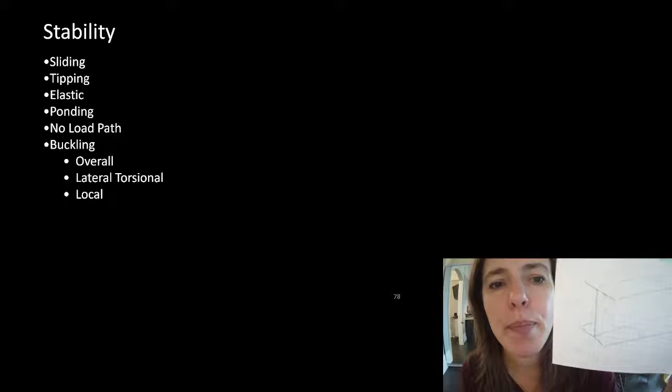So if I had an I-beam, or the flange of a beam - I normally have sketch paper here waiting to go. If this is an I-beam, local buckling would be... my husband's a much better drawer than I am. Local buckling is when just one element buckles - you can see what happened to my flange here, it went whoop. The whole element, the whole beam didn't buckle, but one local part of it did. That's local buckling.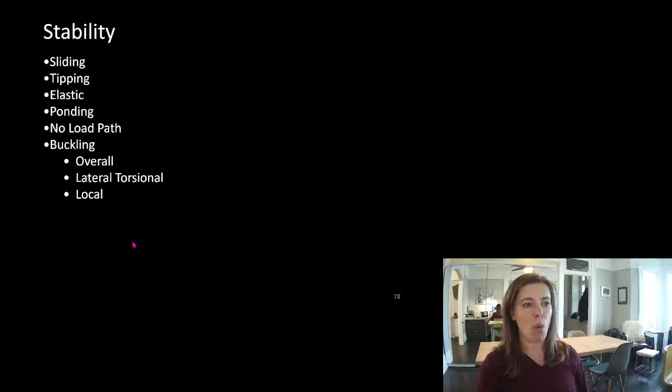Sliding is when the force pushing it sideways overcomes the weight holding it down against the friction. Don't worry about these too much. What I'm drawing here with these arrows is an early look at a free body diagram. We're going to get heavily into free body diagrams and we're going to draw a lot of them coming up, but this is kind of a first simple look at one.

Tipping is when we have a big enough force. The friction is fine, it doesn't slide, but our weight might not be high enough and we tip over this point. So we have enough friction, but we also don't have enough weight to stop us from tipping over, and over our building goes.

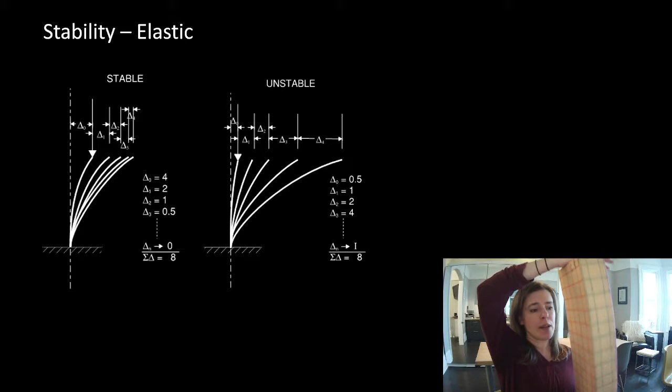Elastic stability: imagine I've got this object here and they build it just a little bit crooked - there's tolerance in everything, so this gets built a little bit crooked. This is a column, so it's supposed to have load on it. We've designed it so it won't buckle and it's strong enough, but they build it just a little bit crooked. I put my load on it and it moves it a little bit - well, now it's even more crooked. So I keep putting my load on and it moves even more, and then that load causes it to move.

So what we do is an incremental check. We say, okay, I put the load on, what do I calculate it moves? Once it's in this position, it has a tendency to move more, and I do the check again. If each time I do that check the difference in the movement gets smaller, it's stable. If the increment between the changes gets bigger, we have an unstable or an instability problem. We're not going to do any work with this, so don't worry about it - it's rarely going to be a thing that you come across, but it can be a problem.

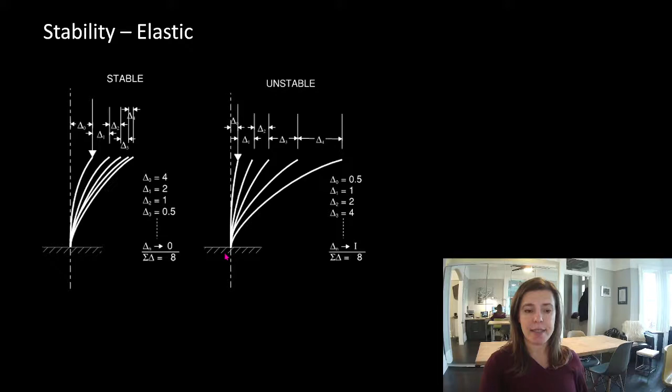Where it might come up with architects is a ponding problem. So let's take a look - I used to have this as an animation, right?

I have a picture coming up. It's not a failure, but it shows what happens. Water fills up this roof and we get a little bit of deflection. You can imagine the water redistributes so the most water is right here in the middle, and now in the middle we've got more water than we had originally. So it deflects a little bit more, which pools more water there, which means it deflects a little bit more.

So again, we do that same check. If these increments, that's the first increment, second, third, fourth, are getting smaller, this is stable. We still have to check that it's strong enough and that it meets the stiffness criteria, but we also want to make sure we don't have a ponding problem. This one, the increments are getting larger. We don't have a stable system. This would keep deforming until we had a problem.

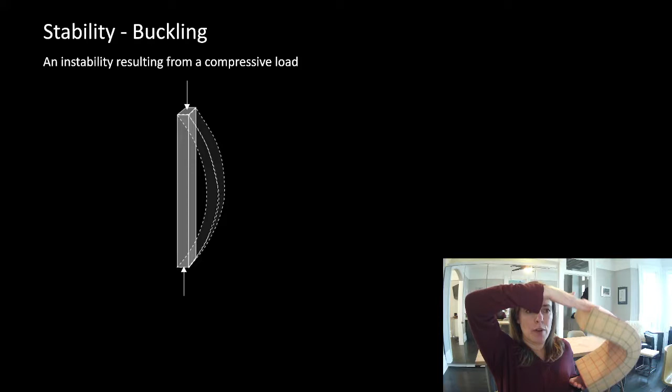All right, let's look at some images of this, because like I said, I find the best way to get your head around these things is to actually look at images. A building doesn't tip very often. This was a weird set of circumstances. In my recollection, no one died from this. I might be mistaken, there might have been one death. So this was not an occupied building. This was a site under construction, and it happened overnight.

What had happened was they had dug a big hole on one side. Now, when we deal with soil, and we're going to talk about this, if you dig a hole in soil, the other soil wants to fill in the hole. If you load something beside it, it really wants to fill in that hole. So if you've ever seen a hole dug in the beach and you went and stood beside it, and your arrival immediately causes it to cave in, you're a surcharge load. Well, what they did here is they dug a big hole on one side and they put all the soil on the other side of the building. So it amplified a problem where the whole building's soil became unstable and it tipped over the whole building.

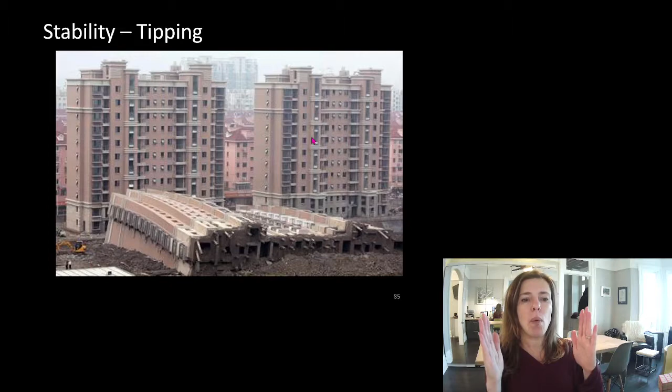Again, this is a very unusual problem. We check it. We want to make sure our lateral systems are tied down into the ground. Sliding, again, not often a problem we deal with in a building.

Okay, ponding. We often worry about ponding on a roof when we do renovations. Environmental mandates are usually that we need, and this is a big thing we're seeing right now with COVID, we need air filters and better mechanical units trying to pump the air through these buildings with better filters. Often in older buildings, the only place to put that stuff is on the roof. So we put it on the roof, and we've now added load to the roof.

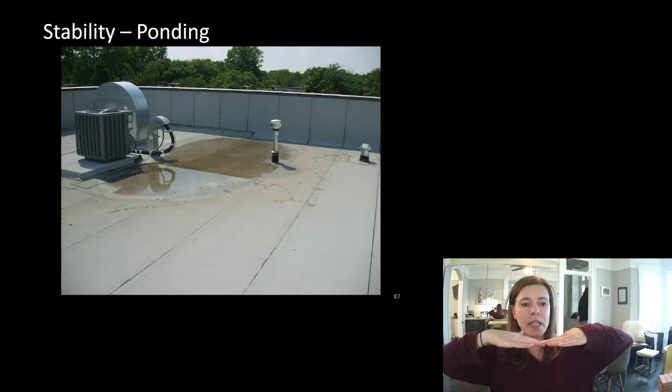So we had a roof like this, it had a little bit of deflection, no problem. We put a mechanical unit on it, and it deflects more. No problem, we've checked it for the weight of the mechanical unit and any snow that might pile up around it. But when the rain falls, we've created a local low spot that was not part of the design. Normally the low spots are where the drains are, and unless the drain was right there anyway, we've probably created a low spot that didn't previously exist. So now we have water that's going to pool there, which is going to deflect it a bit more, which means more water is going to gather. And we have to do that repetitive check to see if that increment gets smaller or bigger.

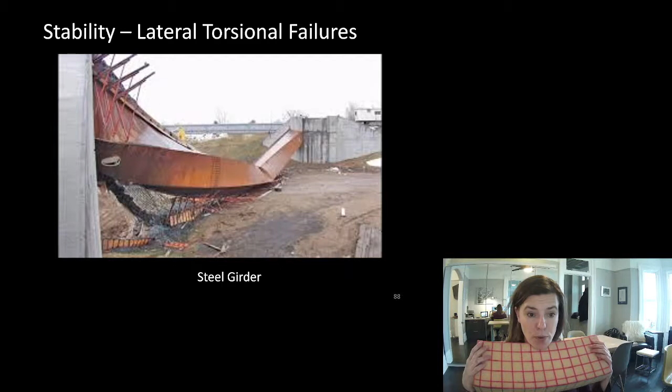So here's a lateral torsional failure. This was a beam that was in bending. Remember, things in compression, if they're slender, buckle, but tension's fine. So here's my beam: the top's in compression, the bottom's in tension. The bottom's fine, but the top is in compression, so it pops out sideways. And that's exactly what happened here. You can see it laterally buckled, and because it buckled, it twisted. So we call beams that have this buckling problem a lateral torsional problem.

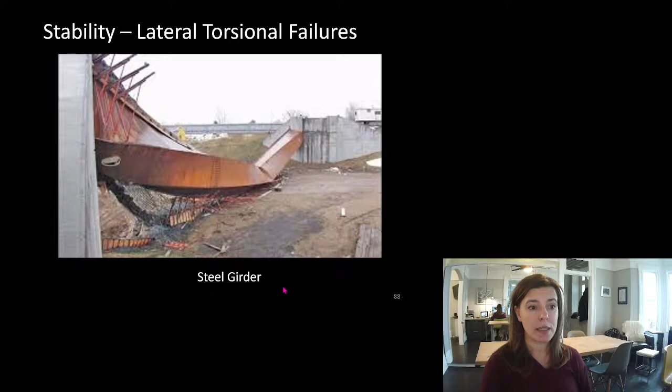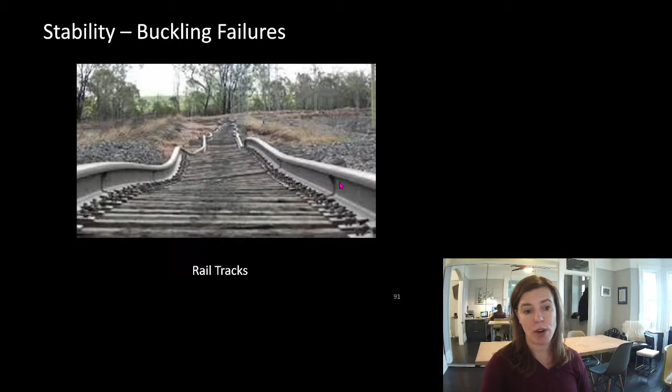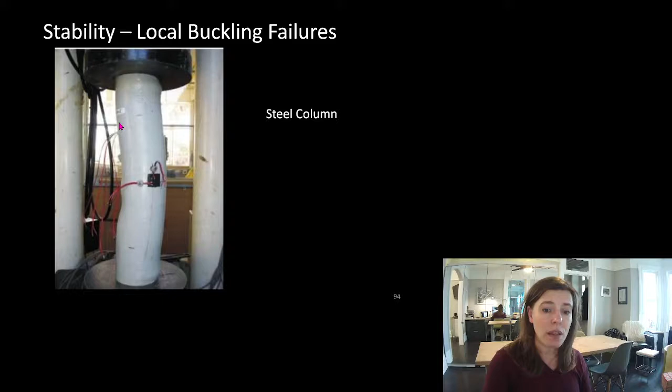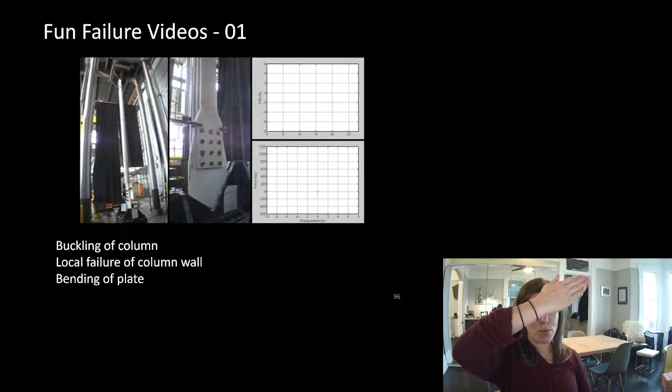When I was working with the guys at Cast Connex, they do cast steel elements and bring them in for structural strength properties, or they'll do them for architectural components. They had to test things, but one of the cool things is we often don't test large objects, so we actually got to see testing of large scale objects here. You're going to see local bending on plates, buckling, local buckling, all kinds of cool stuff. When you watch this, you'll see it cycles through a diagram — that's a hysteresis. What they're doing is pretending this is an earthquake, so they're going to stretch it and compress it. This is supposed to be a brace in a lateral load resisting system in the building, the thing that makes the building stop tipping over. So if these are two columns and our building wants to tip over, we've got one element going diagonal like this. They're analyzing it like this.

Imagine this being squashed and then stretched, squashed and then stretched, again and again. They're measuring how much force they put on it versus how much it moves. This is how much force they put on it, and this is how much it moves. When you do that, it's called a stress-strain diagram. And if you do it repetitively, it's called a hysteresis. So this is a seismic hysteresis analysis of a steel column. There's all kinds of cool stuff in this.

The thing I want you to ask yourself, or what we're going to be doing for everything going forward, is: is it strong enough? For strength, that means the different force types: moment, shear, axial, and torsion. Remember, axial can be compression or tension. Is it stiff enough? And is it stable? We do that for the building as a whole, every system, every element in the building, and every connection. So: strong enough, stiff enough, stable - for the building, the elements, and the connections. We do that again and again and again.

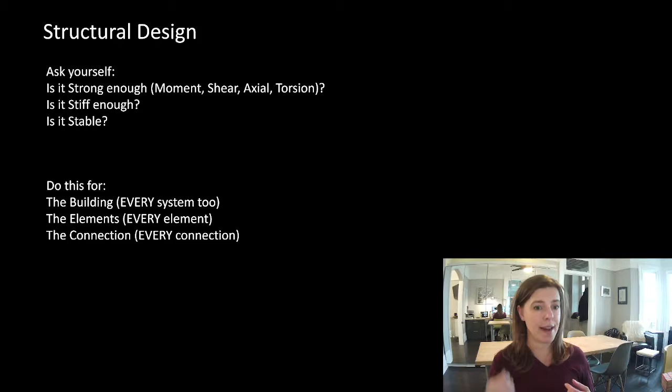You can see why analysis software starts to be the reason we can build these really cool buildings we see getting built today.

Okay, that's the end of lecture 1. Next week, in the first few weeks, we're going to keep it a little bit light. Before we can even talk about these things, we need to know what structural drawings look like. So next week, we're going to jump into looking at structural drawings. Pretty sure that's what next week's lecture is - check the syllabus, you'll see what next week's lecture is.

So the things I want you to take away from today. I like to break these tips down into what you should just know because you want to be an architect, and what you should know to pass my course. Sometimes they're the same things, sometimes they're different. As an architect, you should really understand where the architect fits into the structural design process. You should understand the different types of strength failures. You should be able to recognize a stiffness issue, and you should be able to recognize a stability issue. It's not always obvious, but you should have a feel for what's going on.

For the course, you need to know those math elements that I talked about. They're not that complicated - going back to a lot of things you probably learned in junior high and maybe a little bit in high school. You're going to get used to it. By the end of this term, you're going to be able to fly through those things, so don't panic too much. You should understand that there are different types of strength failures, and you should be able to recognize a stiffness issue and a stability issue.